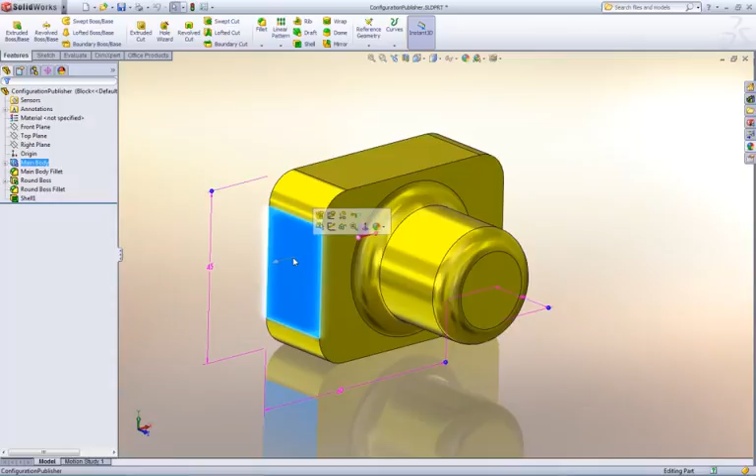The width and height are configurable, and the presence of the round boss depends on whether or not the fillet fails. As you can see, as we change the height below 30 millimeters, the fillet fails, so we'll suppress the boss if this happens. Let's jump into the configuration publisher to set up our model.

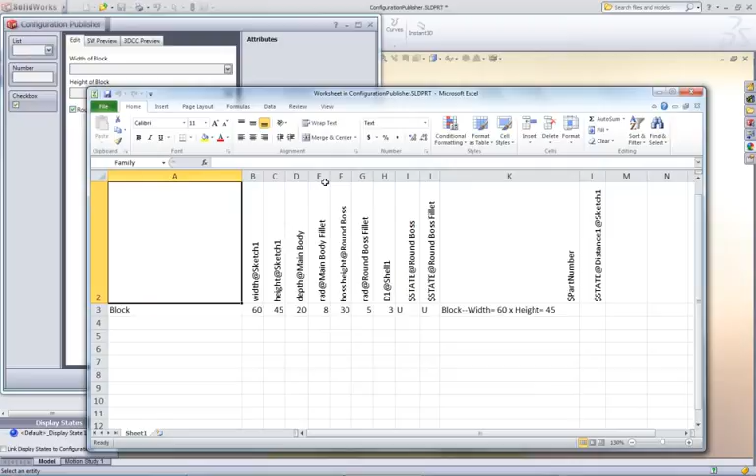Notice that there is a field in the design table named part number, and its value is built using Excel functions. This will be important later to automatically generate part numbers for 3D Content Central. We've already set up the width and its values, the height and its values, and notice that there are no parents for the height. And for the suppression state of the round boss, we have already established the width as a parent, but height is important as well.

In SOLIDWORKS 2011, a control can now have multiple parents. Previously this had to be done one parent at a time to achieve the same capability. We'll uncheck the rows that have anything less than 30 millimeters to suppress the round boss, but we'll purposely not uncheck the 80 by 25 row. Keep this in mind for later in the demonstration.

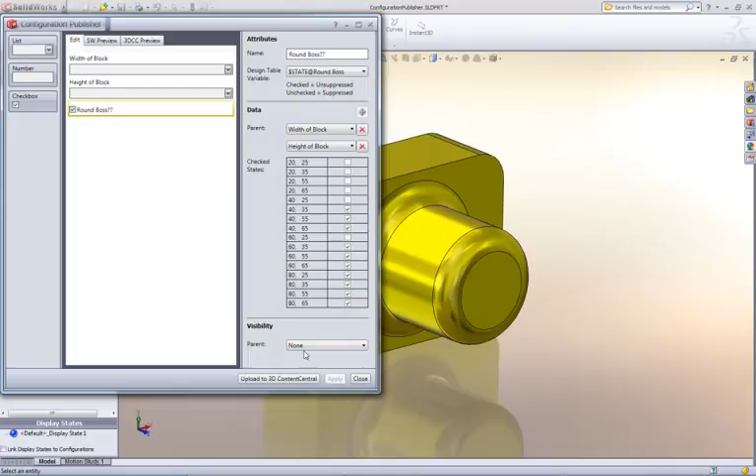We can use the Preview tab to check the logic of our design and see that we do get a round boss when the height and width is more than 30 millimeters. On the 3D Content Central tab, you may notice that we now list the part number from the design table that we spoke of earlier. This gets updated real-time without having to choose the Model Update button and will be uploaded along with the model to be searchable in 3D Content Central.

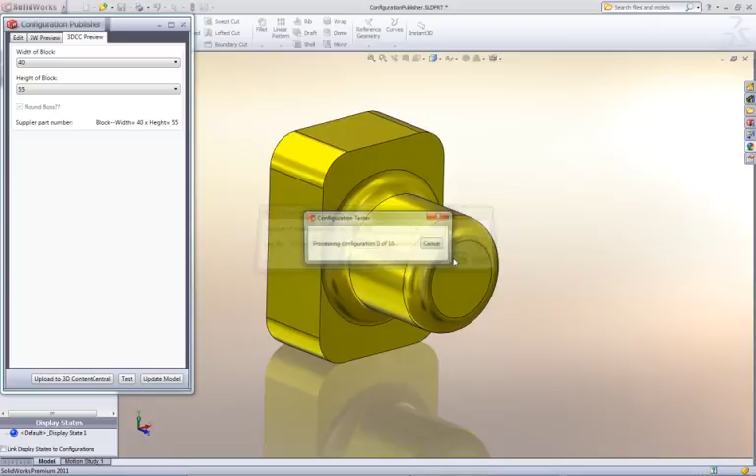Updating the model changes the geometry on the screen, but a real time saver is the ability to test the robustness of the model before the model is uploaded to 3D Content Central. The user has the option to control how many configurations are randomly tested or choose to test them all.

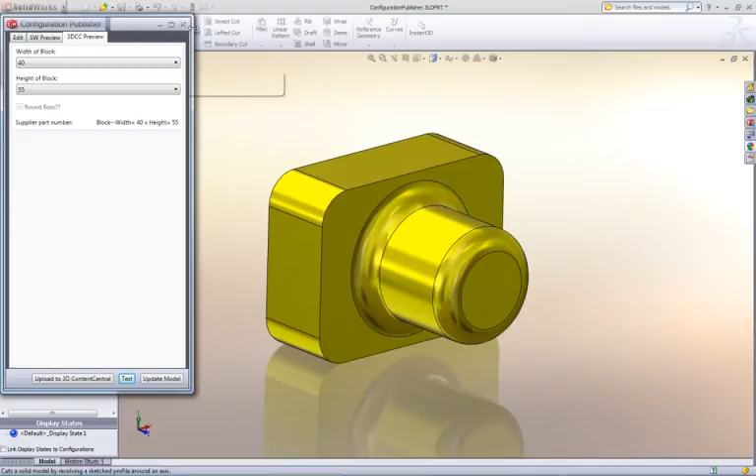Once the test is complete, a log file is created that can be viewed to verify the results of the test. Remember that earlier we chose not to suppress the round boss on the 80 by 25 configuration, and this is reported as having failed as expected. With these new enhancements to the configuration publisher, it'll be easier to build and test the integrity of configurable models.